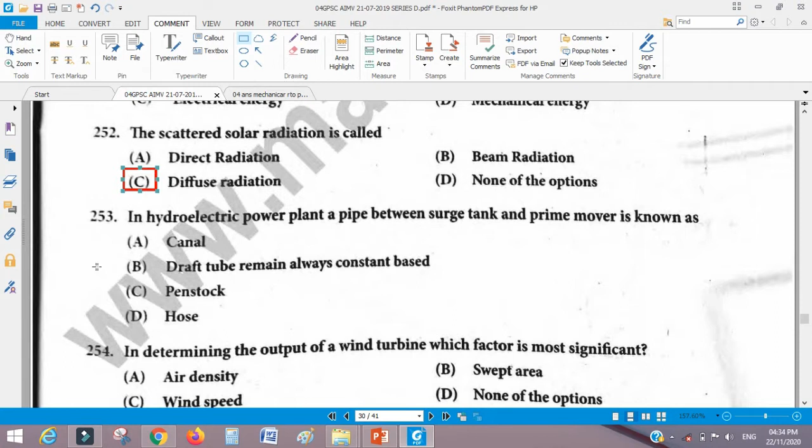In a hydroelectric power plant, a pipe between the surge tank and prime mover is known as penstock.

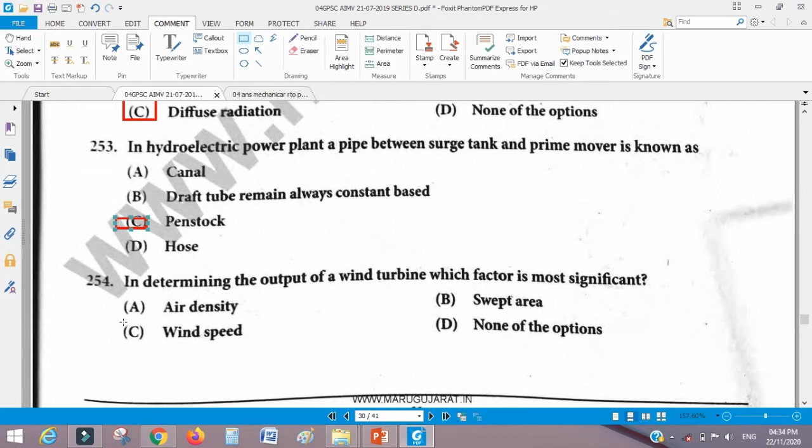Which of the following heat trapped inside the earth's surface is utilized? The answer is geothermal energy.

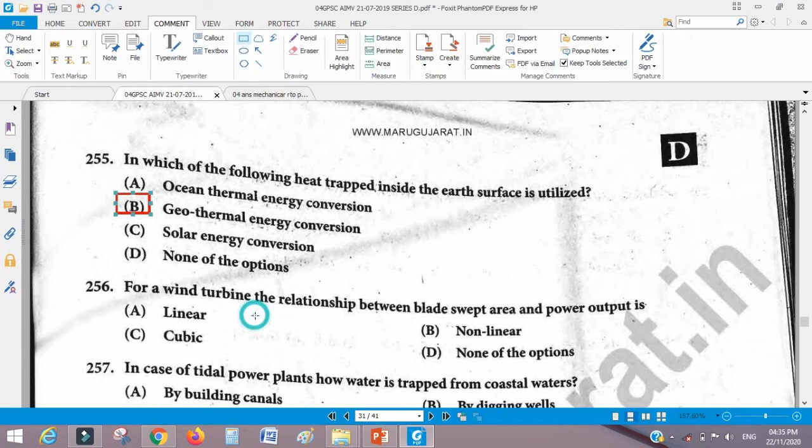For a wind turbine, the relationship between the blade swept area and power output is linear.

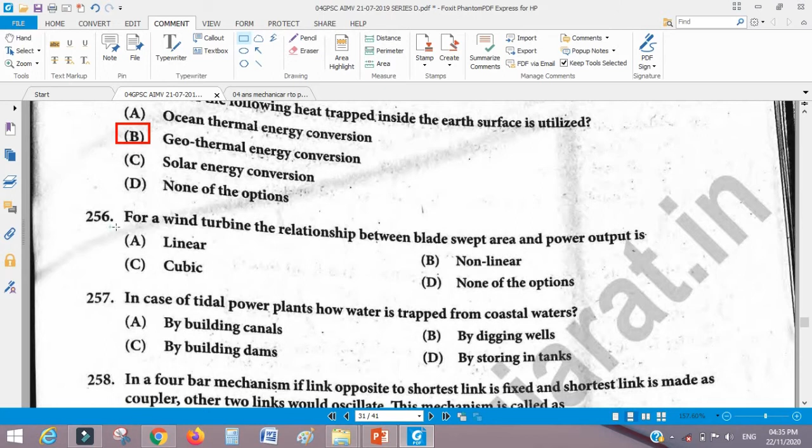In case of a tidal power plant, how is water trapped from the coastal water? The answer is by building dams.

In a 4-bar mechanism, if the link opposite to the shortest link is fixed and the shortest link is made as a coupler, the other two links would oscillate. The mechanism is called a double rocker.

In a kinematic chain, a ternary joint is equivalent to two binary joints.

In a kinematic pair, when the elements have surface contact while in motion, it is a lower pair.

Which of the following is an inversion of a single slider crank chain? The answer is hand pump.

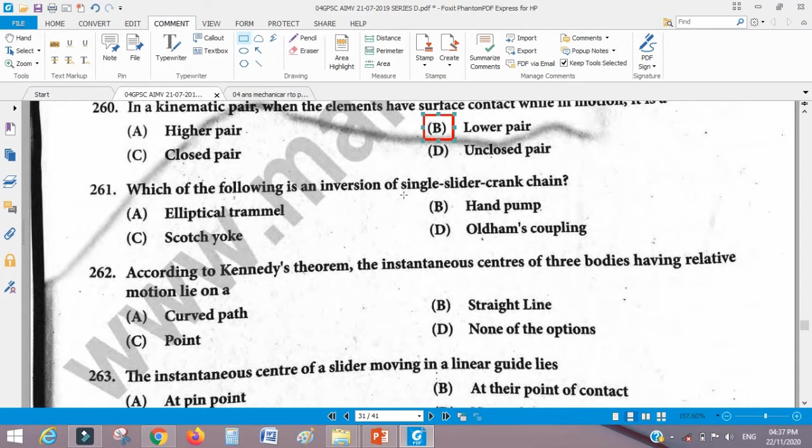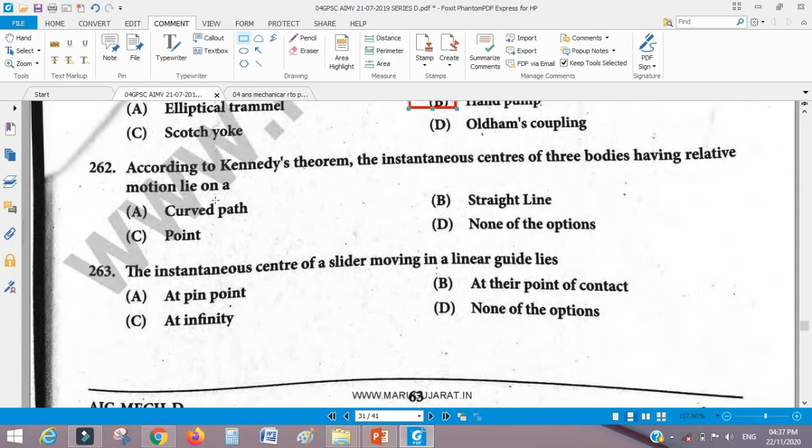According to Kennedy's theorem, the instantaneous center of three bodies having relative motion lies on a straight line. The instantaneous center of a slider moving in a linear guide lies at infinity.

The component of acceleration directed toward the center of rotation of a revolving body is known as centripetal component.

At an instant, if the angular velocity of a link is clockwise, then the angular acceleration will be in any direction, clockwise or counterclockwise.

In a radial cam, the follower moves in a direction perpendicular to the cam axis.

The reference point on the follower used to lay out the cam profile is known as the trace point.

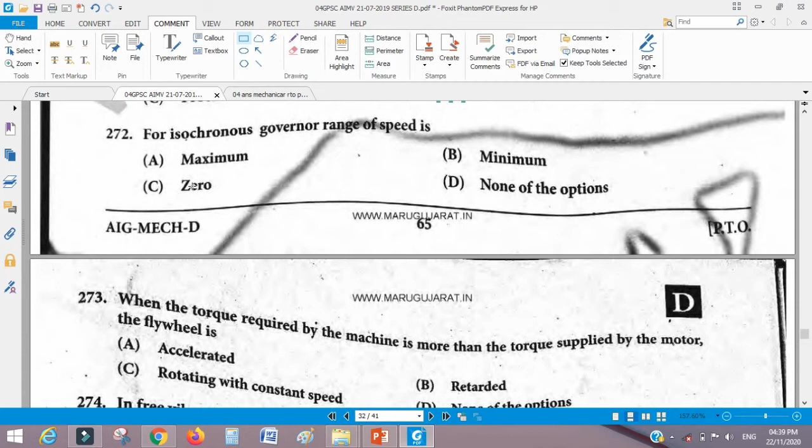When the torque required by the machine is more than the torque supplied by the motor, the flywheel is in the state of retard.

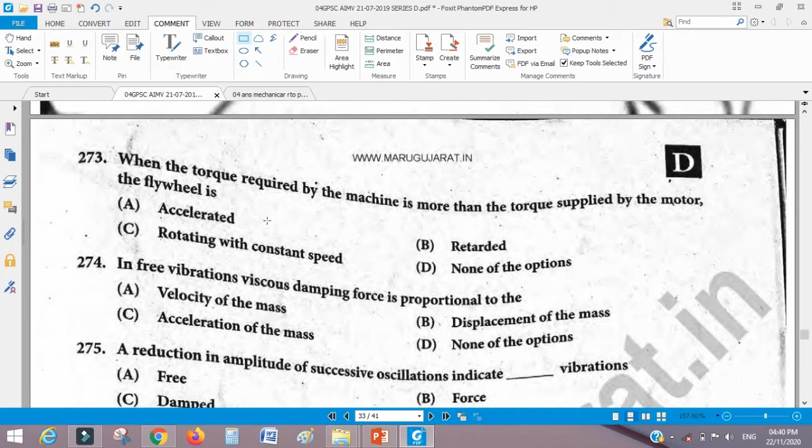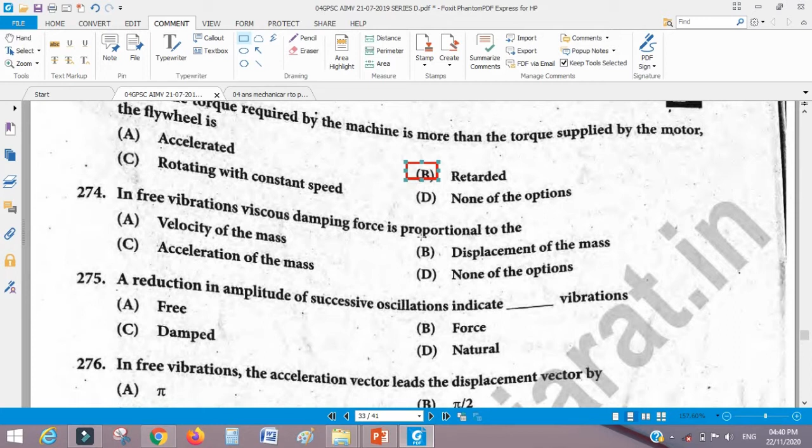In free vibration, the viscous damping force is proportional to the velocity of the mass.

A reduction in amplitude of successive oscillation indicates damped vibration.

The amplitude ratio of two successive oscillations of a damped vibration system is more than 1.

For a helical spring, the ratio of mean coil diameter to wire diameter is called spring index.

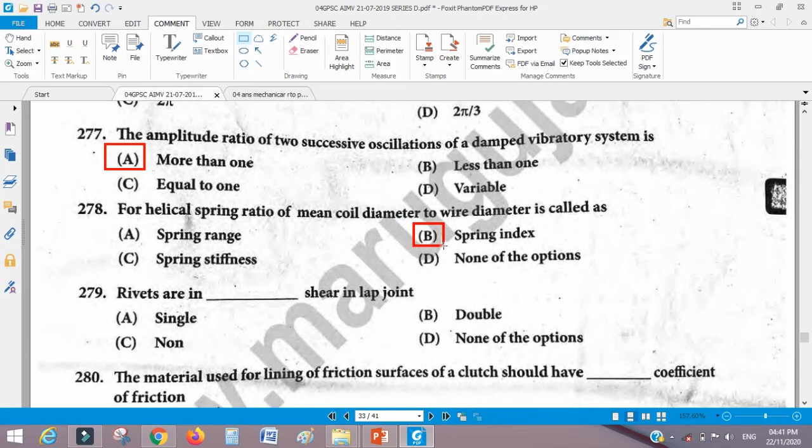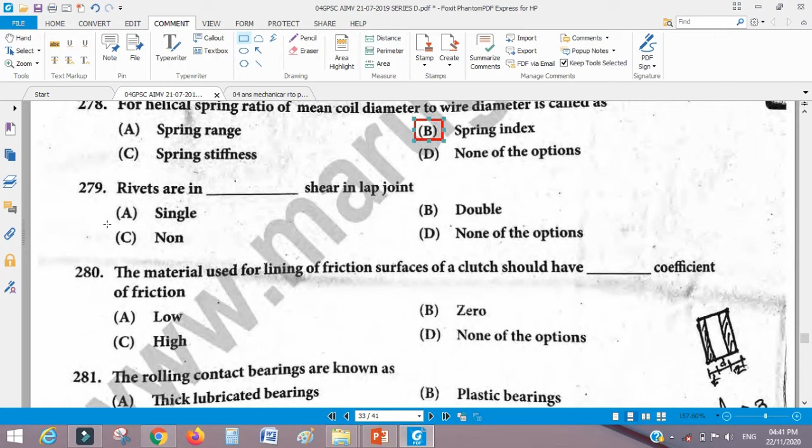Next, rivets are in single shear in a lap joint.

Next, material used for lining of friction surface of a clutch should have high coefficient of friction.

The rolling contact bearings are known as anti-friction bearings.

A cylinder is considered thin when the ratio of its inner diameter to the wall thickness... the answer is none of the options.

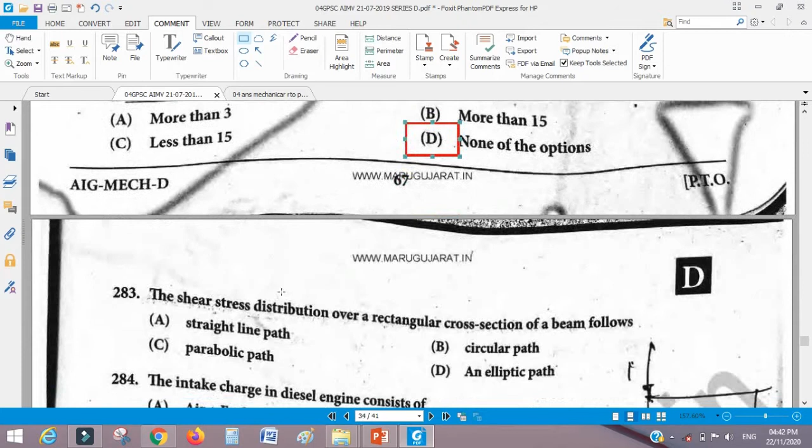Next, shear stress distribution for a rectangular cross section of the beam follows a parabolic path.

The intake charge in a diesel engine consists of air alone. The answer is air alone.

The venturi in the carburetor results in increasing the air velocity.

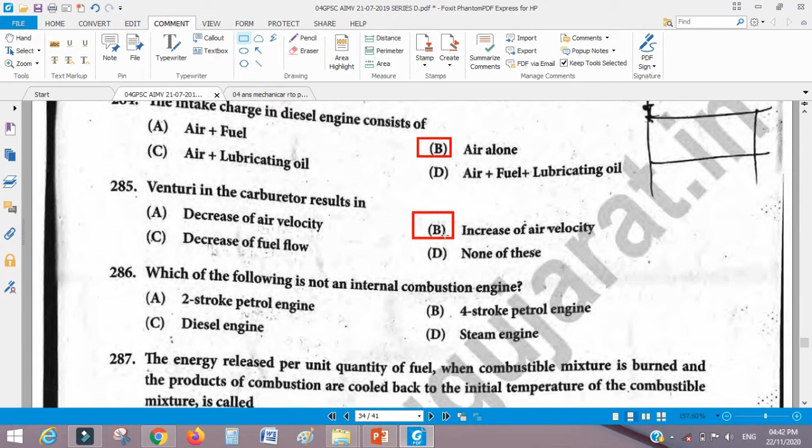Which of the following is not an internal combustion engine? The answer is the steam engine.

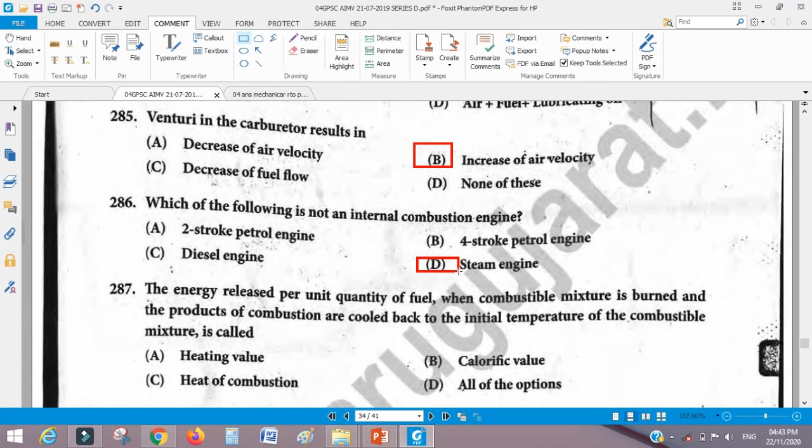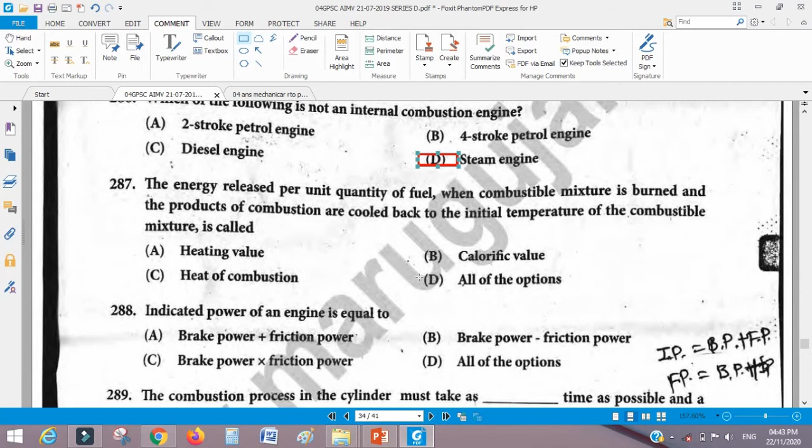The energy release per unit quantity of fuel when the combustible mixture is burned and the products of combustion are cooled back to the initial temperature is called... The correct answer is all of the options: heating value, calorific value, and heat of combustion.

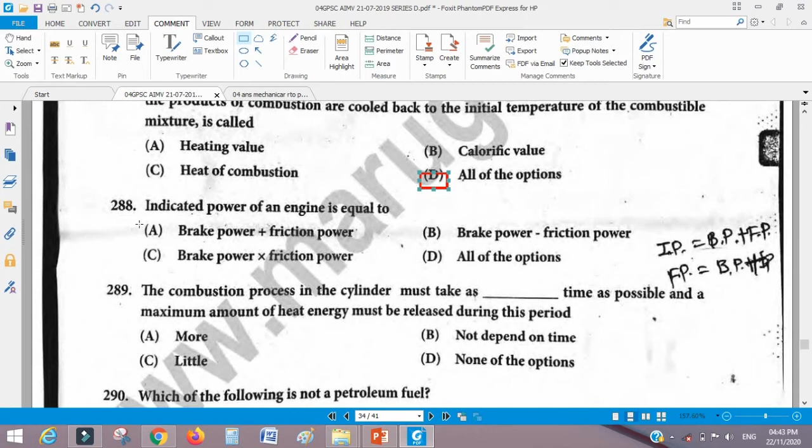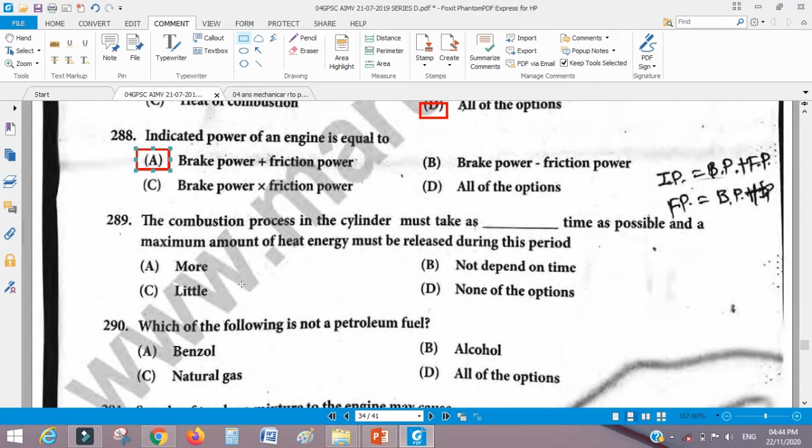The combustion process in a cylinder must take as little time as possible, and a maximum amount of heat energy must be released during this period. The correct answer is 'little'.

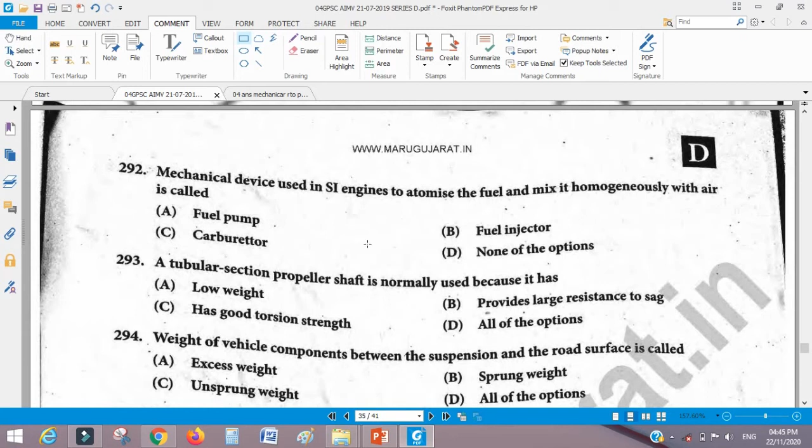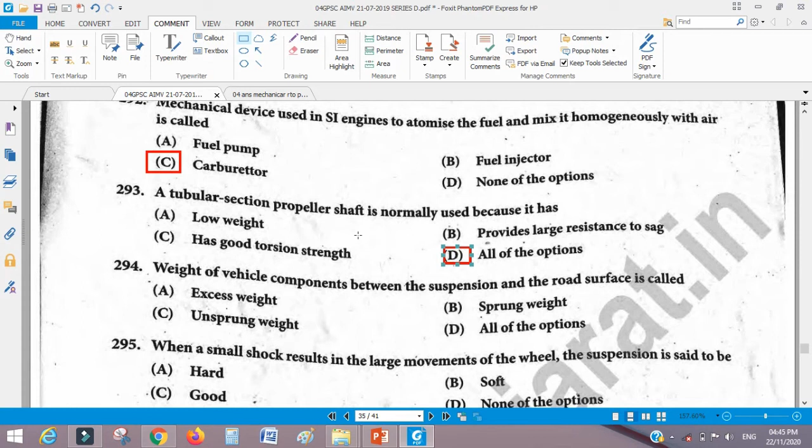The tubular section propeller shaft is normally used because of all of the options: it has low weight, good torsional strength, and provides large resistance to sag.

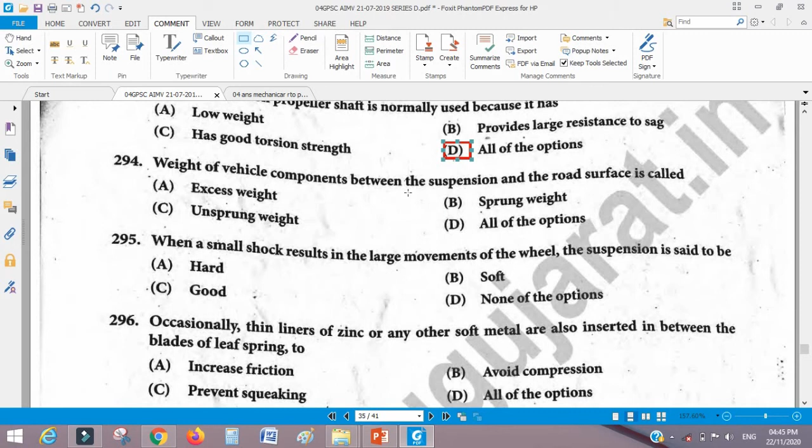The weight of the vehicle component between the suspension and the road surface is called unsprung weight.

When a small shock results in a large movement of the wheel, the suspension is said to be soft.

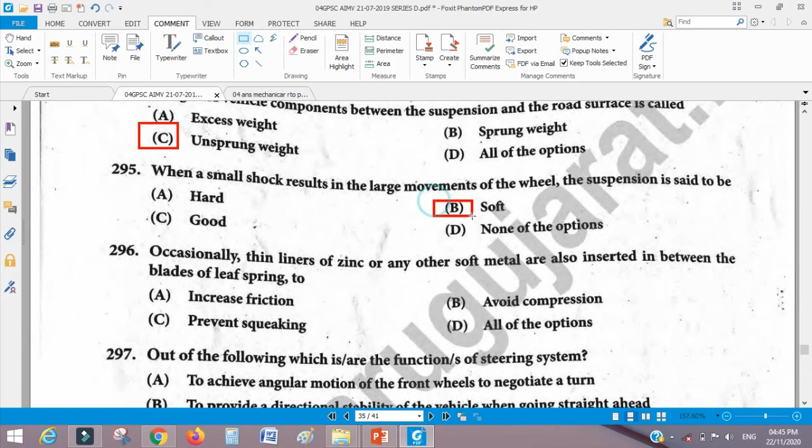Occasionally, thin liners of zinc or any other soft metal are also inserted between the blades of the leaf spring to prevent squeaking.

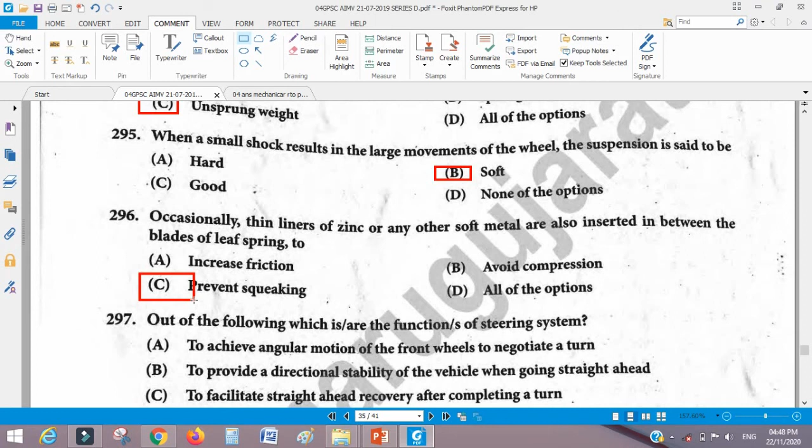Next, out of the following, which is or are the functions of the steering system? The answer is all of the options.